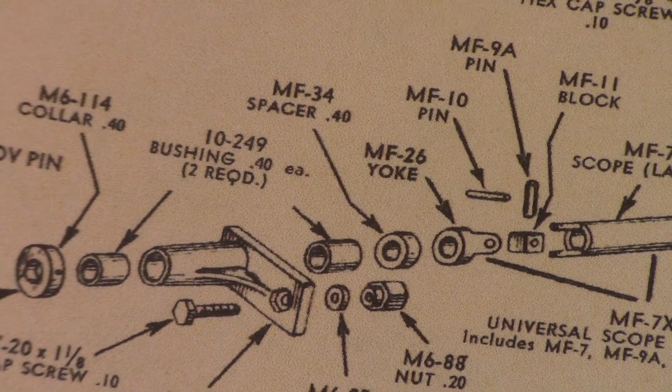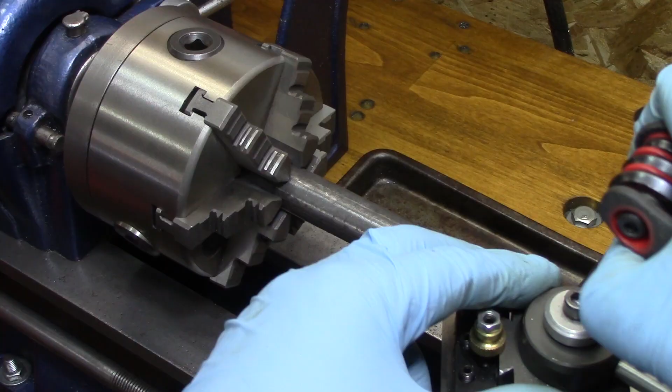When I took this Atlas mill apart, I had no idea there were some missing parts and some parts that were homemade. Now I have to make a missing part. The dimensions I have on that drawing were just from looking at people's videos and scaling it to what they had, trying to make it fit from there. This is some hot rolled metal from Lowe's, and it was the right dimension, so I decided to face it off, polish it up, and make the very first bushing out of it.

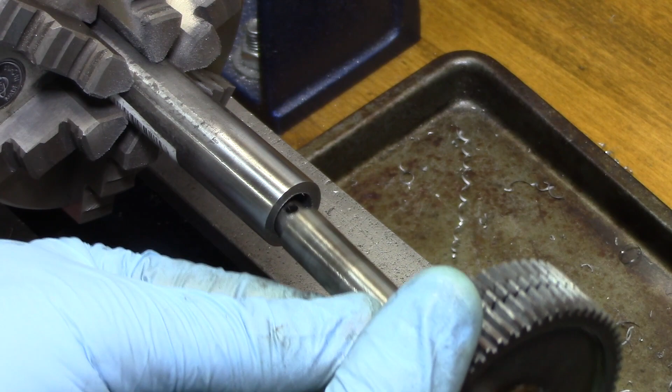Initially I had planned on just drilling it, but then I decided why not bore it and get it closer to a perfect size. Now over to my parting tool.

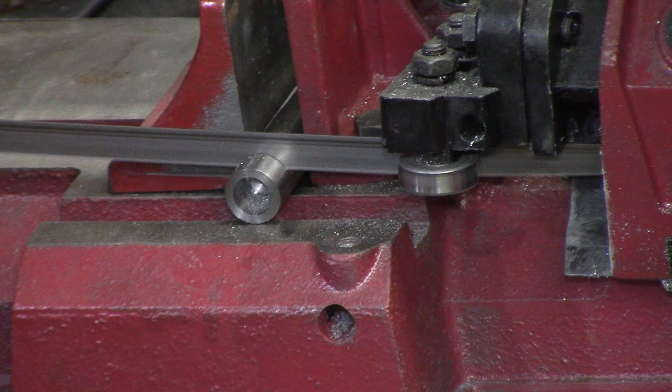I cut it a little longer than it's supposed to be so I could get it back chucked up and then faced off to the proper length. I'm just shooting for a nominal dimension here, but I still want to keep it fairly accurate.

One of the things I tend to do is go too fast and overshoot the dimension, so I'm taking my time and sneaking up on this.

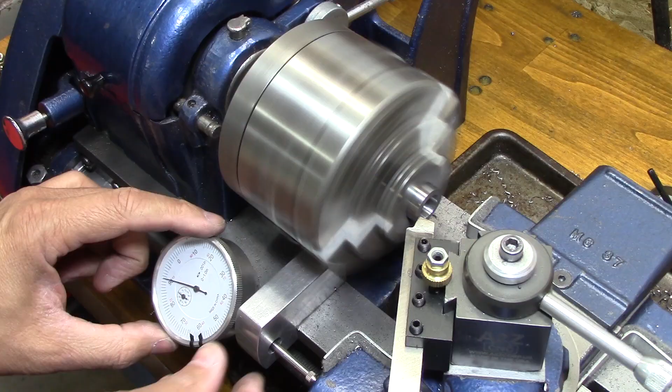And there's the fit I'm looking for. So I took the part out, measured it precisely, and figured out how many thousandths needed to be taken off.

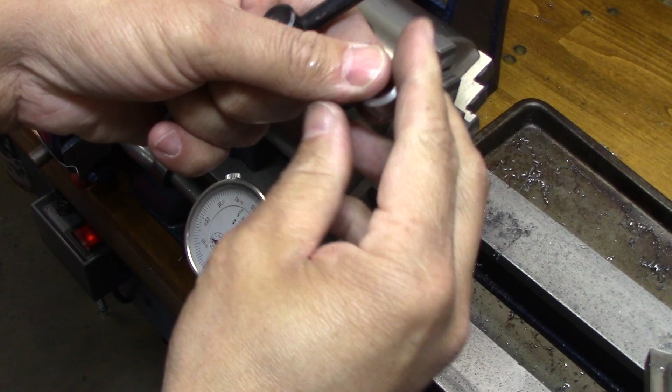Now it's time to carefully take off the sharp corners on the inside and outside, and the part's done. And here she is, shiny and on size.

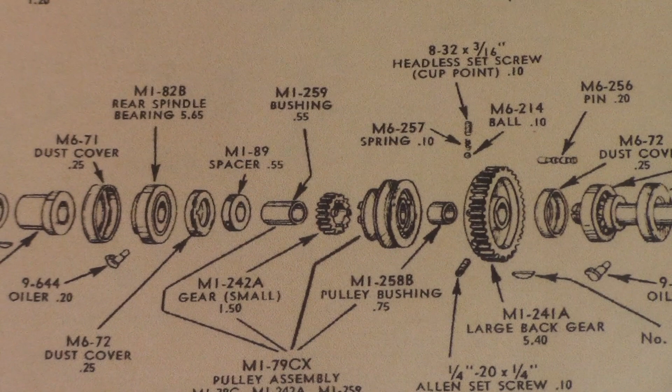Now this next part had a homemade fix from the previous owner, and I take a look at the parts diagram and try to make sense out of it. I see that they just brazed a bushing into place, and now I'm going to make a mandrel so that I can get this gear and bushing tight on the mandrel so I can machine off the brazing.

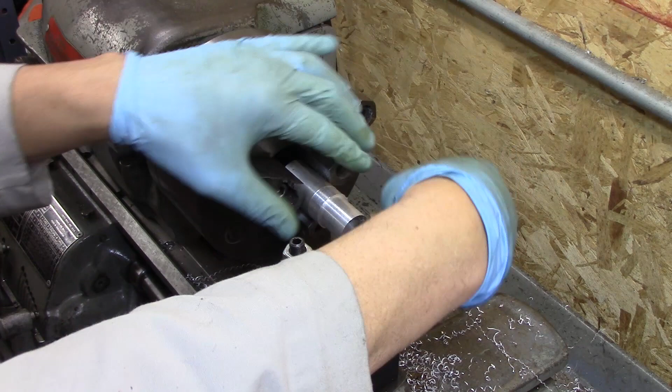I'm looking for a pretty snug fit so that when I get the chuck tightened down onto it, everything stays secure.

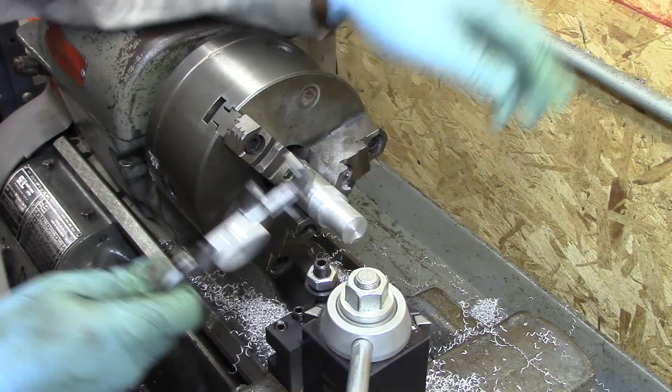I'm such an optimist. I start with this parting tool, but I end up taking it over to my other parting tool - my saw.

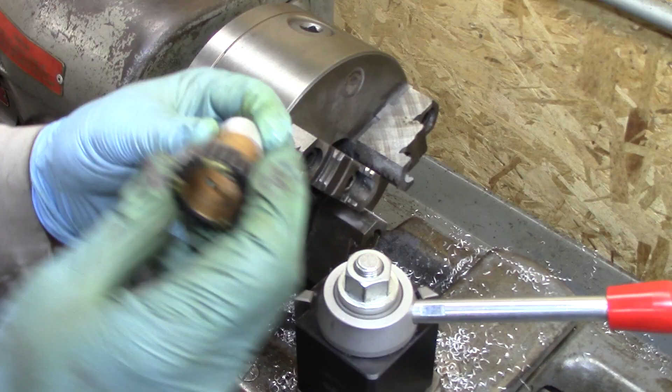Turns out it's a real snug fit, just like I'm looking for, and I'm going to get her chucked up and see if we can get that braze off of there. Once I got it in the chuck, I stuck it in and out several times, moving it around, just to make sure it was running dead true.

I slowed this down because I'm scared that when it breaks loose, it might swing around and break itself.

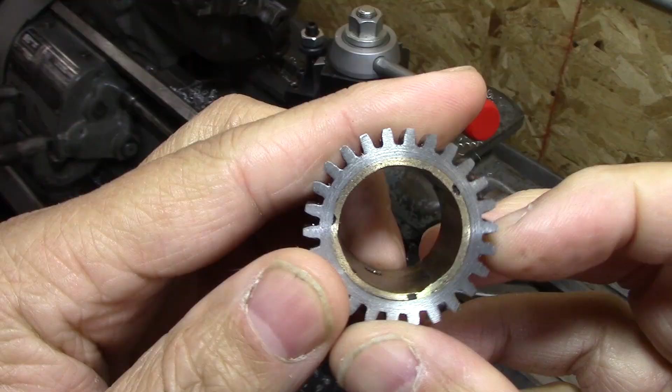Now I just keep making several small cuts until I break through. Alright, I know the welds, or the brazes, are gone.

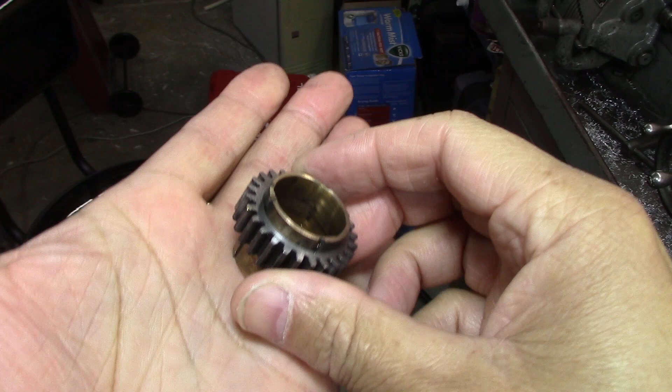Now I just gotta try to get that out of there. Well, what do you know, I just banged it a couple times and there it's coming out. So we'll get that bushing out of there.

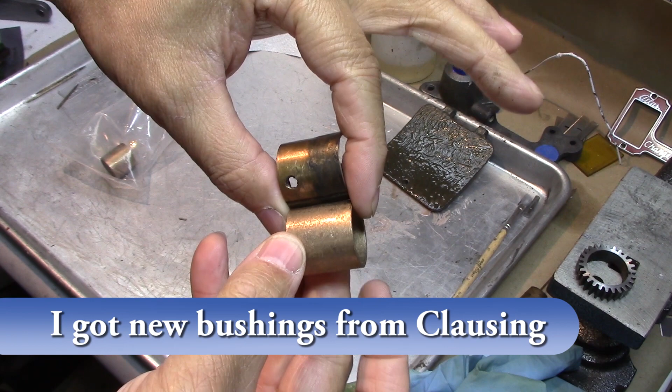Well, the first thing I notice is they are the same height, but I don't understand why these things had grooves in them and those holes.

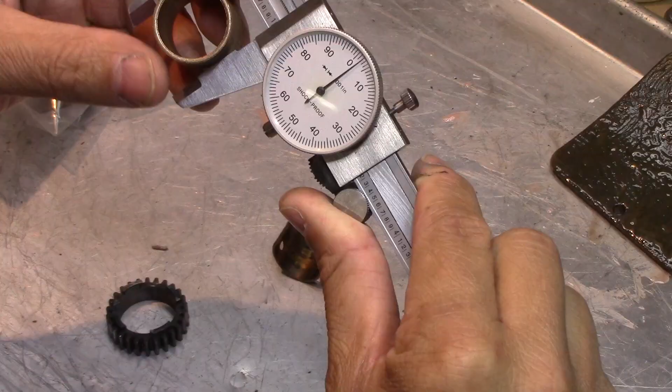So now we got to make sure we can get this into there. I mean, 1 inch 2 thou. And that's about 1 inch 1 thou. So that's actually good news.

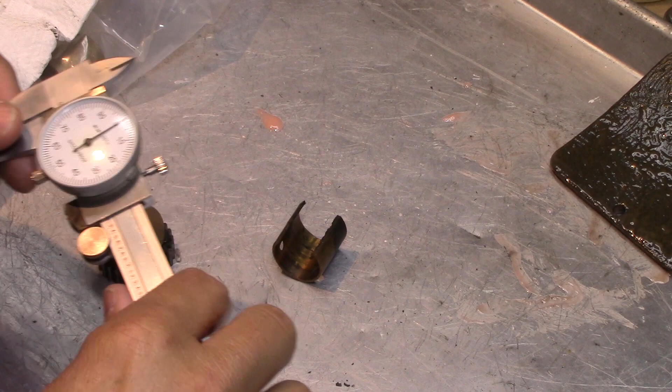That'll press in there with a little heat and a little cooling. So yeah, a little heat and a little cooling, we should be able to get those to fit.

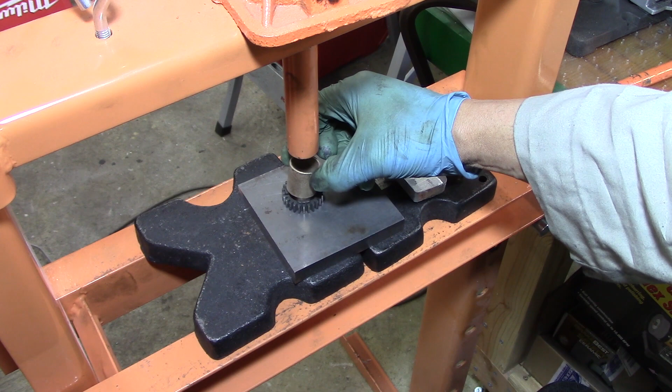Now the bushing is in the freezer while I heat up the gear, and now I'm going to press them together.

Now that gear and bushing I got in the freezer, and now I'm heating up the pulley part, and then I have to press those two together. Now these have to mesh in there a certain way, and I forgot about that.

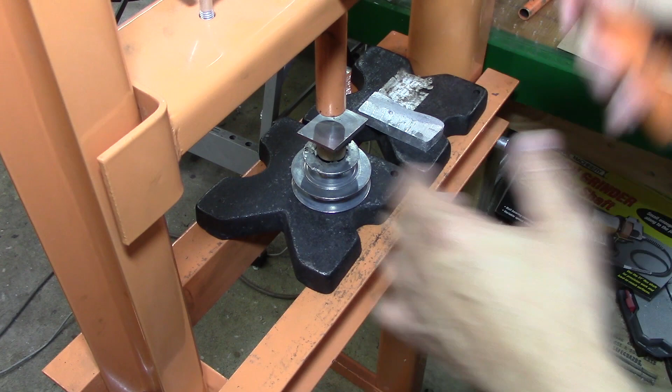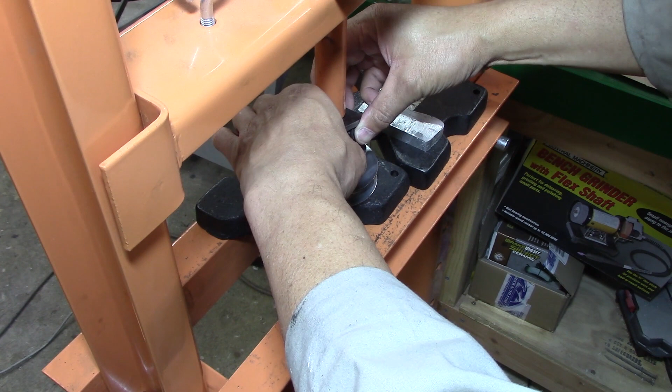I am so focused on doing this quickly, getting it in there straight, not raking it, that I forgot about the little timing issue where there are little gear type things that have to mesh. I totally forgot about it.

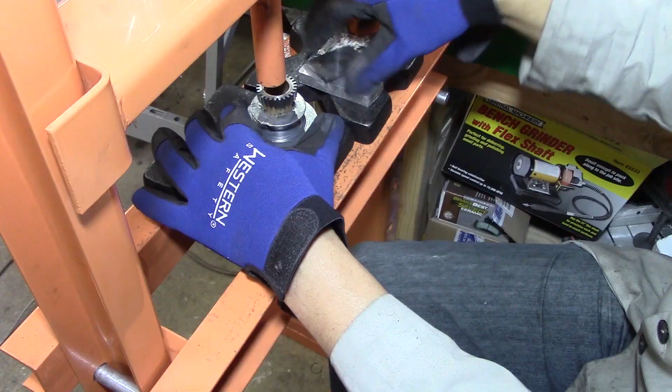So I went and got some gloves because that part is really hot and the other one's cold, and I think my Herculean strength can get it apart.

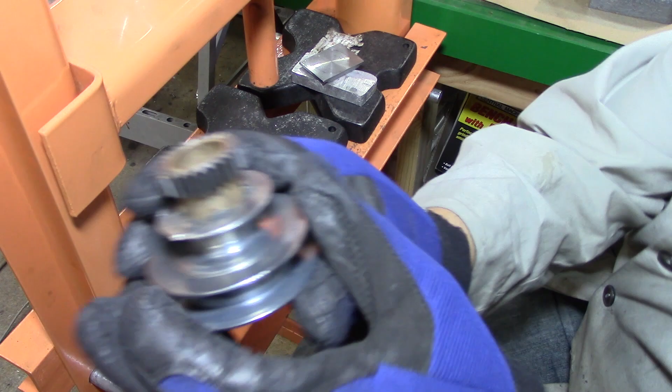I'm sadly mistaken. Oh, I messed up, guys. I got the things not lined up right, so I got to pull that off and start all over. Actually, I had to get some aluminum and press that out.

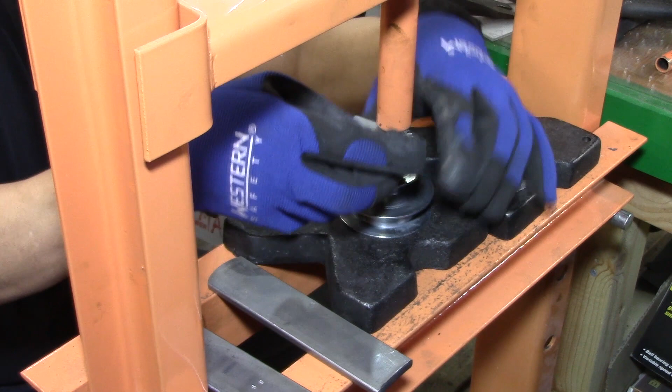Okay. There you go. Keep on going. Keep on going.

So I solicit the help of my son, and he does the hard work. It's not like tough. Nope, undo it.

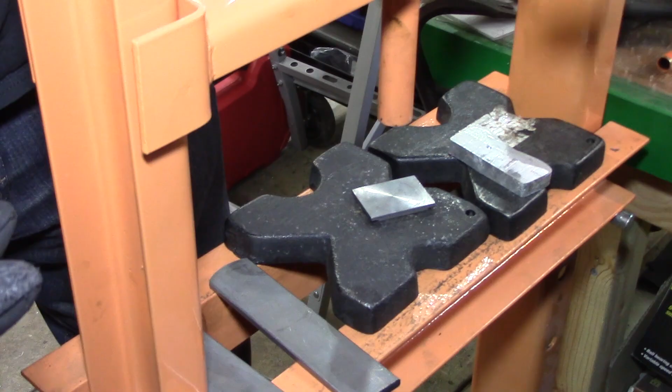All right, is it hot or cold? I had no idea how I was going to hold this, but then I thought, why not chuck it up in the four-jaw and give it a shot?

That's running pretty true. Now you've only seen a couple of seconds of it, but it took me a long time of just taking my time to get that to run true.

Now I'm being real careful because there's so little material that needs to come out of here. I'm taking my time, just a couple thou at a time. It'll fit on the shaft, but I have to force it on, so just barely taking out a little bit.

I hit it one more time after this and got it to fit like I wanted it to.

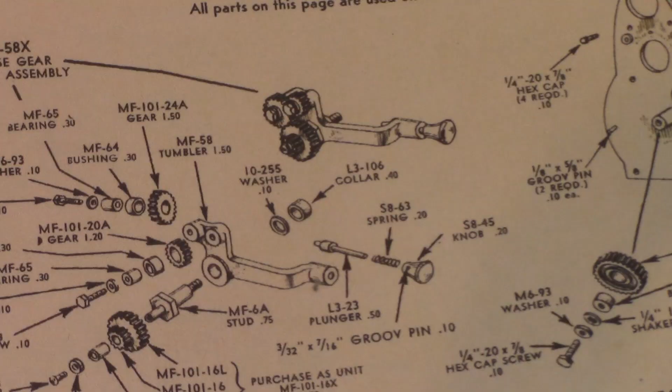This is yet another part that I didn't even know was missing until I started putting it back together. It's called the collar, and again I'm just using video to try to scale it to get dimensions. Alright, now that I got that drilled out, I'm going to head over to the cutoff tool.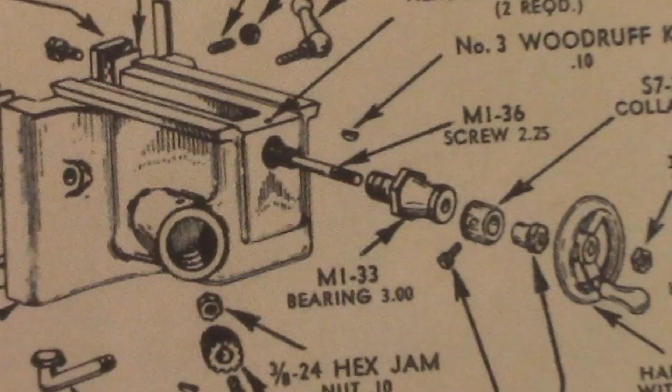Alright, there she goes. I machined this one exactly like the other one. Now here I just need to make a small spacer to make a couple of parts fit better together.

I rigged up this little thing here just from something else I had from making fidget spinners. I'm going to take and make this washer a little bit smaller.

Now luckily I have a washer that has the correct inner diameter. I just need to bring down the outer diameter.

As soon as I see this off the mandrel, I realize I'm going to have to redo it. It's just not precise at all. I'd have to do that again.

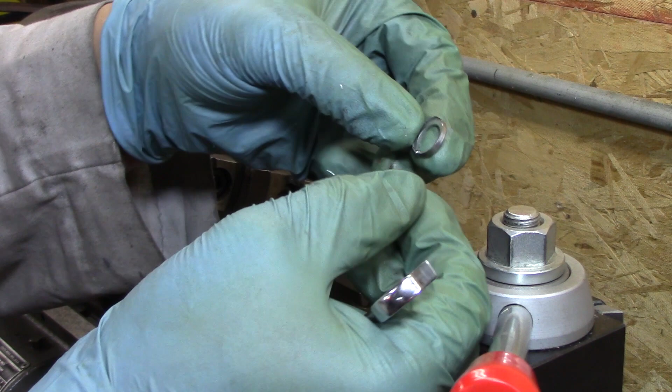Let's see. Yeah, with me just centering that thing up by eye, it just wasn't precise enough. So I make a mandrel to make that washer fit on there real tight and redo the thing.

Yes, it takes a lot more time to do it right.

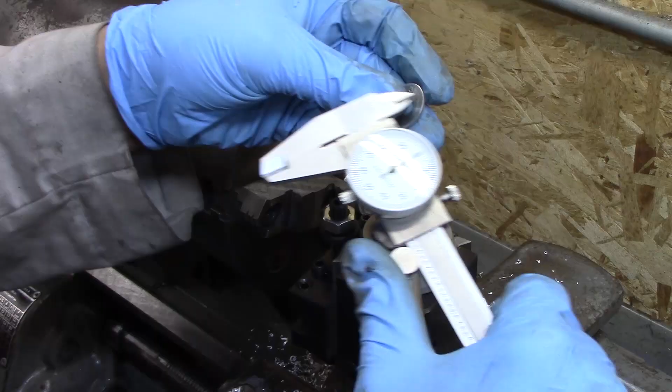Now that I have it drilled and tapped so I can tighten it down, now it's time to make the register where the washer will register up onto to be tight. I was trying to avoid all these little steps, and that's why I tried it the quick way first, and now I'm doing it the right way.

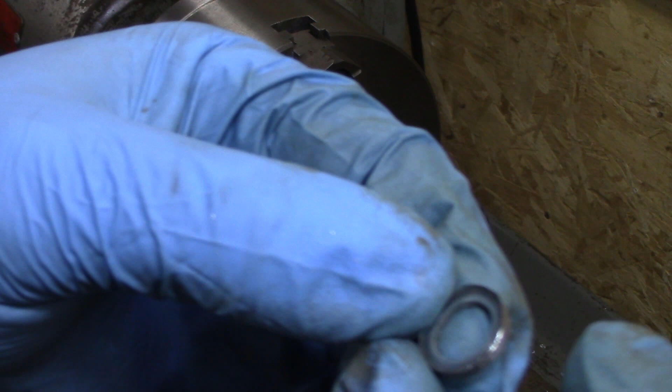So this is what we made. Got to clean up the burrs and see if it works. Alright, that's what we got now.

Now I'm lubing up this little spacer, and all it is to give me a couple more threads that I can engage the nut on at the end to tighten it down, and it worked out perfectly. You kind of see where the spacer is right there, just taking up about 3/16 of an inch or so.

That just may have fixed it, ladies and germs.

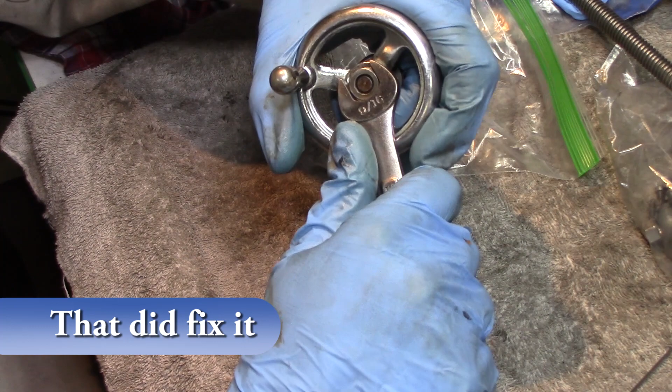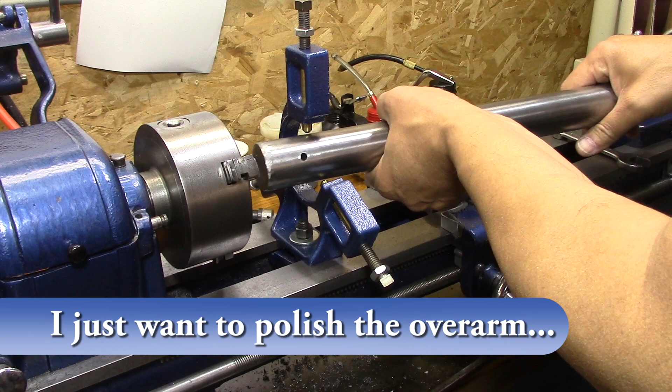Alright guys, this is the very first time using a steady rest. So experts out there, please be kind, because I don't know what I'm doing here.

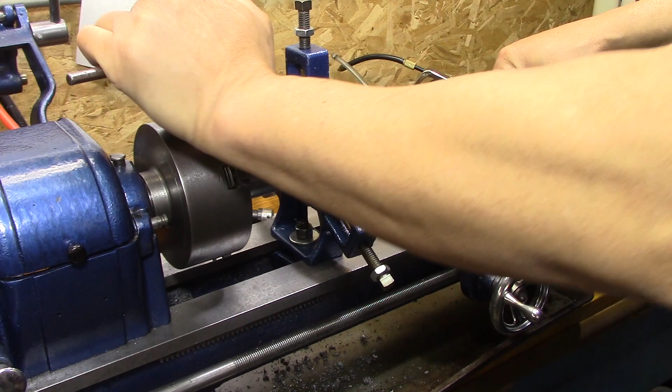But what I think the best way to do this is to get this thing in the chuck, and while it's close in, try to get this thing set. And then I'll take it off and put it back at the back, and that should kind of center it up.

I'm going to take it till it barely touches right there, and then lock that one.

There we go, tighten that one. Oil on there.

And let's turn this baby on and see what we get.

With this size piece, I would much rather use my South Bend lathe, but I just don't have a steady rest for it. Later on I find out it's easier to put a dial indicator on the back and get it dialed in back there with the steady rest.

Now to make the M1-26 rubber spacer, I got on McMaster-Carr and got some oil resistant rubber tube, trying to make those little rubber things. This is the size it has to be to fit down in there, so what I did was grab one of the long 1/4-20 bolts, chuck that up in the lathe, and get this turned down to that diameter. I started machining it with high-speed steel and thought, why not try carbide?

Okay, carbide is not the thing. Go back to high speed. I just destroyed that end of it, so I flip it around and start all over from the other side. All I could take was like 5 thousandths of a cut, because if you did more than that, it just didn't work—it would get real grabby.

And at the end here, I take a little emery paper on that just to make everything nice and smooth.

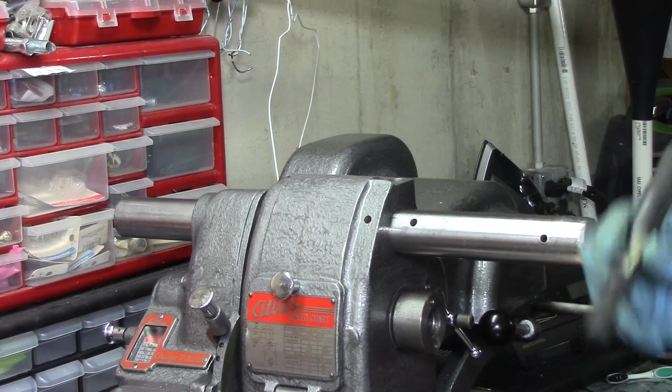Well, let's go see if it fits. I think it will. Well, here's the little rubber, and it fits perfectly down in there.

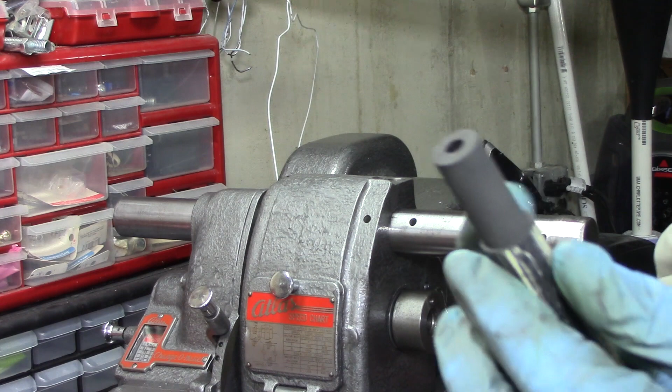So now what I need to do is cut these off to length, and cut about 2/3 of them off in the vertical. Let me show you what I mean by that.

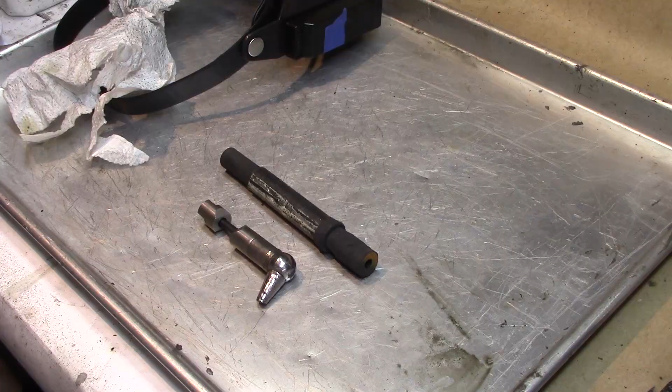Okay, so this is how this thing goes. There's a spot for the square nut to go into. Then the rubber piece goes on here, and you have to cut it. Then this part, then a spacer, and then the cap. This one's broken—I'd like to find some more, but right now I have to use that.

So just looking at people's pictures, this piece of black rubber is about 2/3 the length of these things. So what I'm going to do is cut this off about 2/3, get it on there, and then we'll cut down that way.

Well, check that out—that's just eyeballing it on the lathe. I took it on there, had it still on the mandrel, and just kind of let the knife slowly roll down into it to cut them off. So they're nice, clean cuts.

And the next cut will be this way, so I need to figure out how to do a nice level cut across there. That one might be just an eyeball and go down it like that. That's probably what I'm going to have to do.

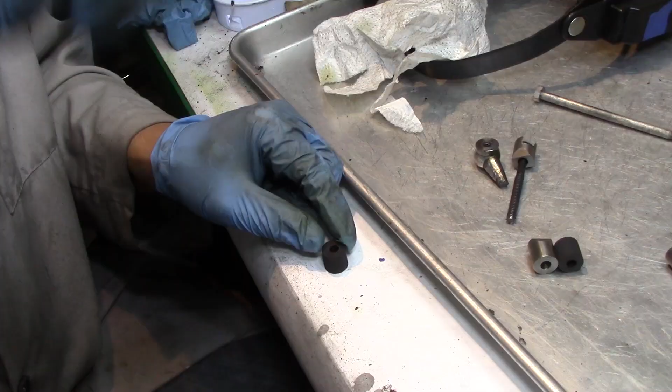Now, from all the pictures I've seen, there's a couple of threads that show, so that means I'll have to cut it across the hole. So I hope this is good enough to do this.

Okay, looked like it cut out pretty good. Now let's see, it should go on here like this. And when it squeezes, it should conform and clamp down that thingamabobby. Let's do the other one.

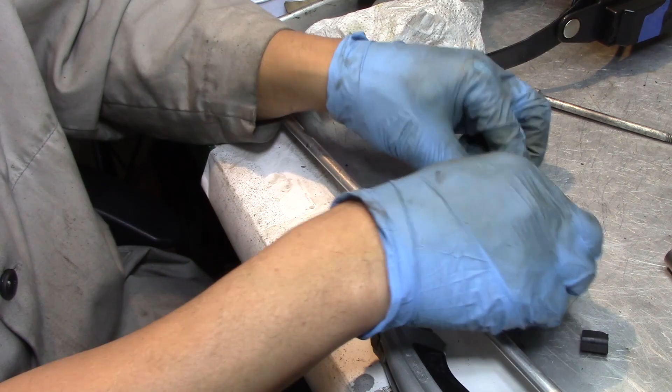Alright, I think that's got it, ladies and germs. For those of you who have watched this whole series, you remember it took me several weeks to get this thing out. Look how easily it just slides in now—but that's the way it's supposed to be. It had gotten stuck in there, and here's a new one.

There are actually two of these overarm locks on this thing. I only have one of them in there right now, and with just that one, it locks it down snug as a bug.

Okay guys, a couple of lessons learned. I keep learning the exact same lesson every single time: measure twice, cut once. I had to make one of the spacers three times. I thought I had it right and just undershot it by a little bit, which gave me too much wiggle room and I didn't like that. So, measure twice, cut once again.

Also, when you're machining rubber, it will grab. If you take a big cut, it's going to grab and try to wrap itself around. So have a real sharp piece of high-speed steel and just take little light cuts. Mine worked out fine that way.

Also, for the steady rest—first time using one—I realized you don't want to tighten it up real tight. If you can just get it up against it, it makes it work a lot better and not make so much noise and chatter.